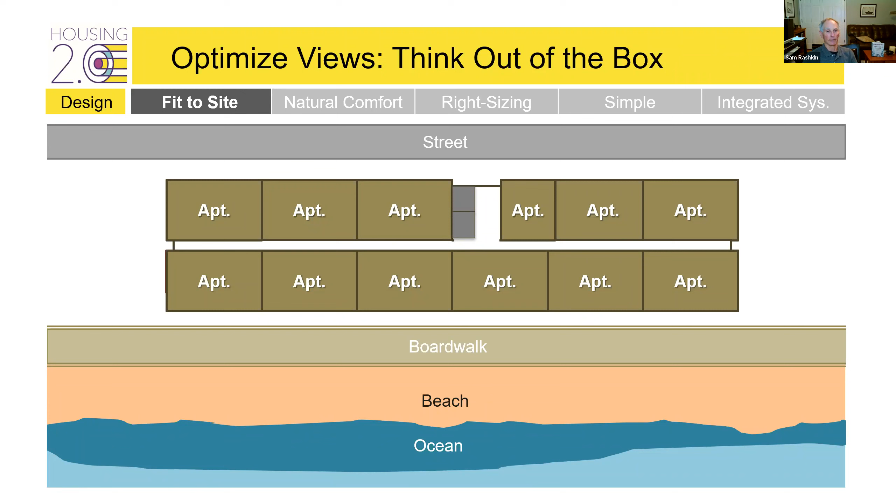So I have a narrow lot on the waterfront, and I'm going to build a multi-family project. The normal traditional solution is just to slap down a double loaded corridor, put the apartments on either side. The problem is there's a building on the ocean, so the double loaded corridor kind of splits it in half, and you have half the apartments with a great view of the ocean, the other half with a horrible view looking across the street at another apartment building and a busy street.

So what you wind up with is half the apartments with a great view, half with a really bad view. And if these apartments are worth X on the street side, the apartments on the ocean side are probably worth 2 or 3X. So you're losing all that value, the asset value lost because only half your units have the great view.

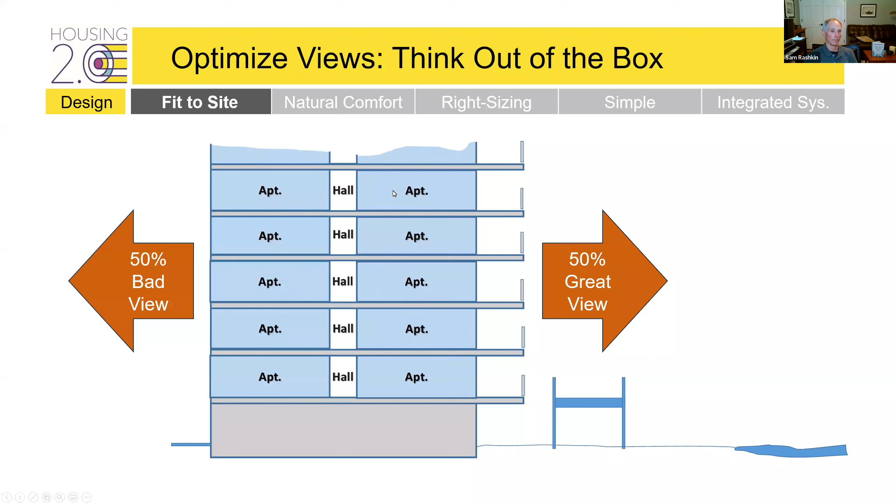That loss is substantial. So when you want to think out of the box, this is a solution borrowed from Le Corbusier, a famous project where he did a corridor every 3 floors. I do it every 2 floors because for disability or universal design purposes and others, you can't have everyone use stairs. So you have 1-story apartments facing the ocean and 2-story apartments facing the ocean.

Now a couple of things happen. One is you wind up with a corridor every other floor, so all that space goes back into marketable use space for your apartments. That has more value than a hallway. The second thing is your elevator only stops every other floor, so it's also lower cost for the elevator. And you have 100% of units with a great view.

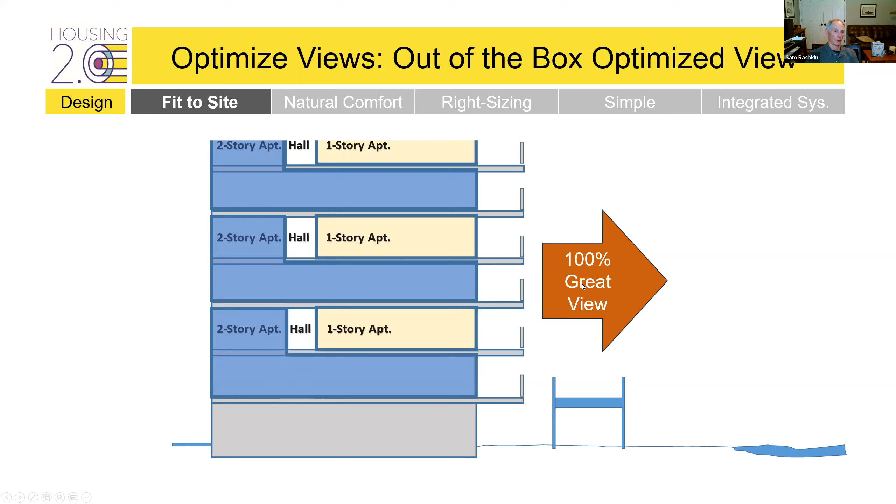This is how it lays out. You have your 2-story apartments on the street side. So that's the first floor you come in: a bedroom, a stairwell, and a bathroom. And then on the front side, you have your 1-story apartments with bedrooms and living spaces, bedrooms and living spaces.

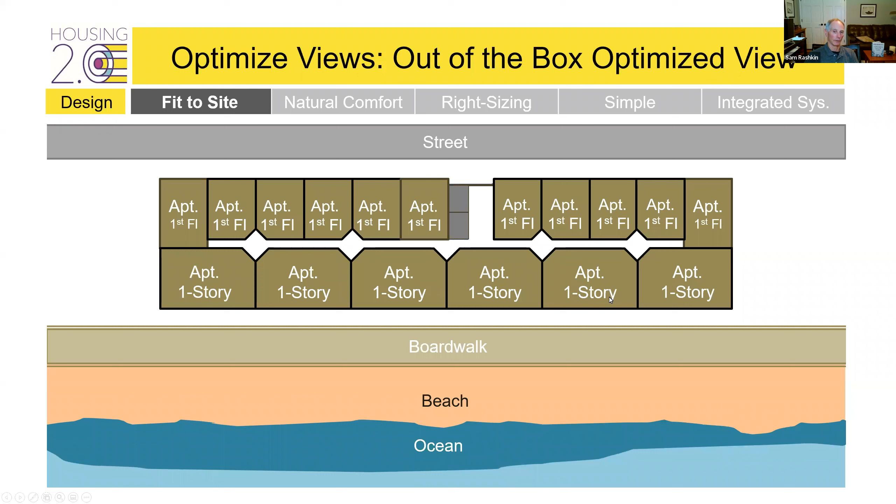And then on the floor with no elevator, you have a contiguous second floor of your 2-story apartments. So you have your master bedroom, your master bath, your laundry, your half bath, your kitchen, your dining, your eating, a normal layout as you would expect going across. And so 100% of units get great views.

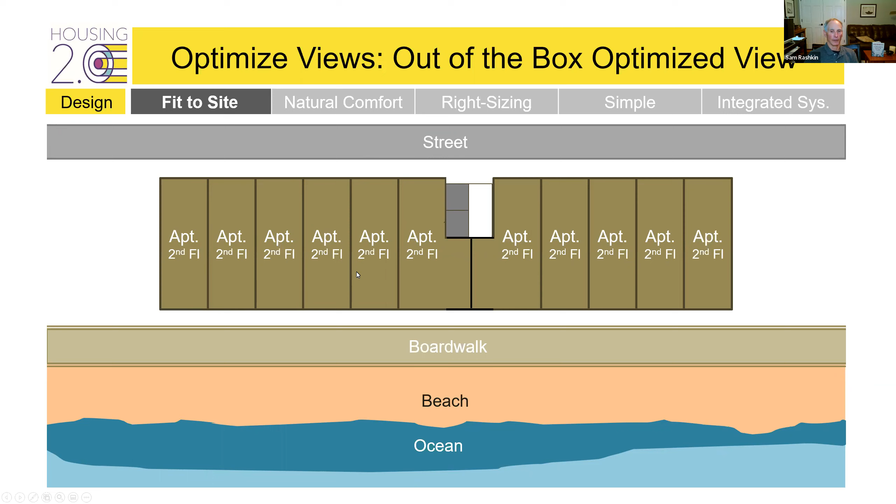The same thing happens if I have a deep site instead of a narrow site. You'll often see this layout where the balconies are kind of looking over each other, and the views aren't that great. Even these balconies are often kind of blocked. That's just the traditional U-shape or separated buildings on a deep lot.

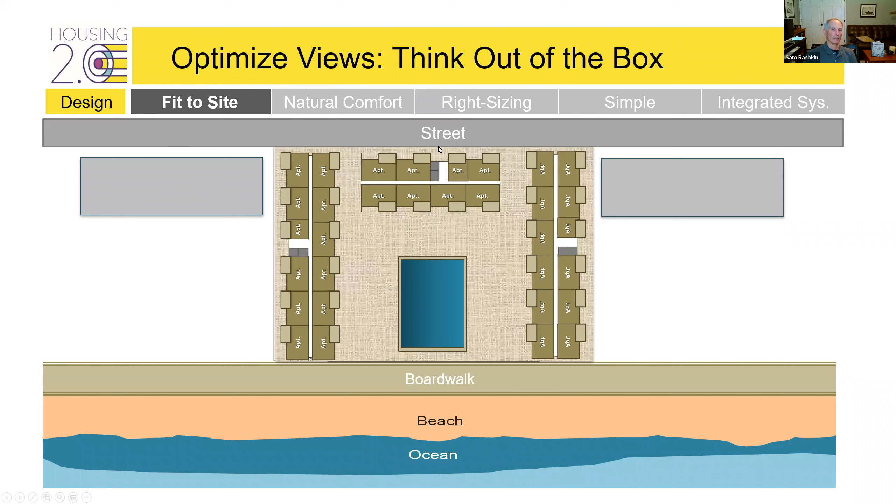I would suggest if you take view as a dominant factor, that's where you start. You might wind up with something like this: a sawtooth design, where every home has a complete unblocked view of the ocean on this side as well. And then I throw in some open spaces, pickleball courts, and landscaping just for playing around.

But you kind of get the idea that once you understand the absolute force of having great views on the economics and satisfaction of your buyers, then you just let that drive all your design.

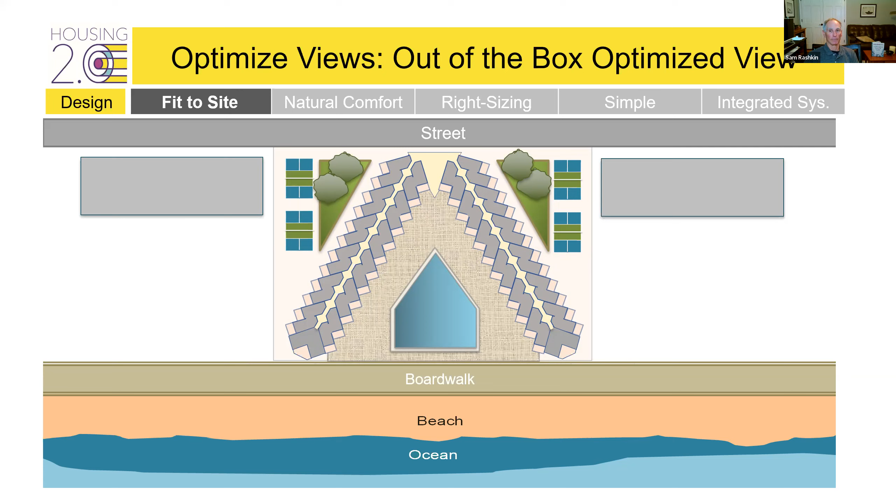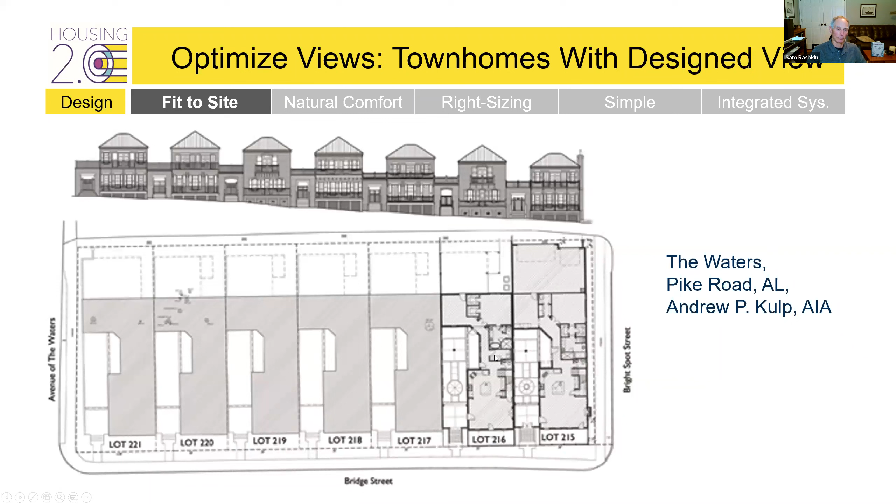And so I found a project that actually did this after I put this down. In Alabama, of all places, Pike Road, the Waters, there's the exact layout. You have the garage in back, but you come in to a middle entry, a full room, a full front porch, all these rooms off the view. And there's the actual project as constructed.

I years later went and checked Zillow and found one of these homes was for sale. I was a little disappointed in the courtyards themselves. I thought they were missing expert landscape design because they had the views and things were after.

The last thing we'll talk about on fit to site will be this concept about rear garages and front porches. Again, I think most people understand the value of front porches for community connection. When you want it, then you can sit there. Rear garages get rid of what's called a pig snout design concept, where the garage dominates the front elevation. Again, this creates a better community connection. The no rear yard concept, or no rear fences, is kind of tough for some regions to do, because the market preference seems to have gotten established for fencing in properties in California and a lot of the western and southwestern states. So you have to kind of go with that as best you can.

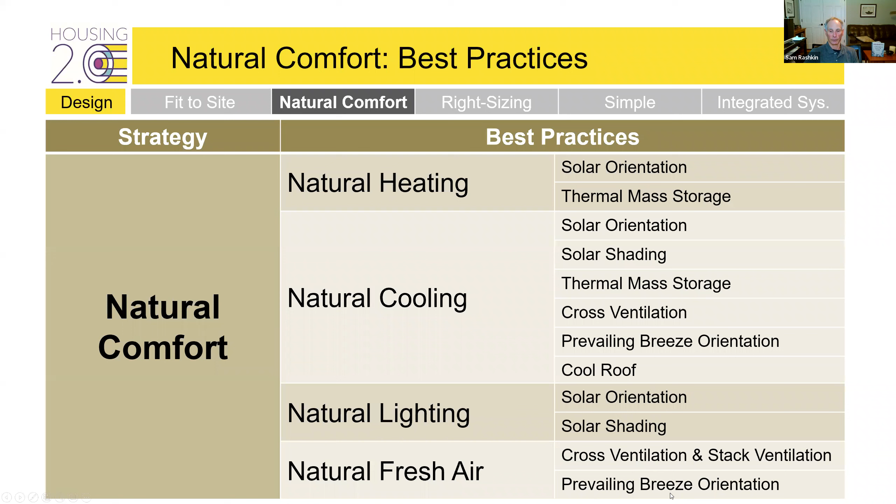I remember I proposed a program when I worked at the California Energy Commission, where we would certify and give a label to every home simply based on orientation. You didn't have to do anything. If you were on a north-south facing lot-meaning the front and back, the main elevations, face north-south-we would give you a natural comfort certification, just to make it an issue in the MLS so that more developers would want to offer more natural comfort lots and actually create east-west streets with north-south facing homes. It's funny how I wound up at Energy Star, always having a mindset for labeling homes.

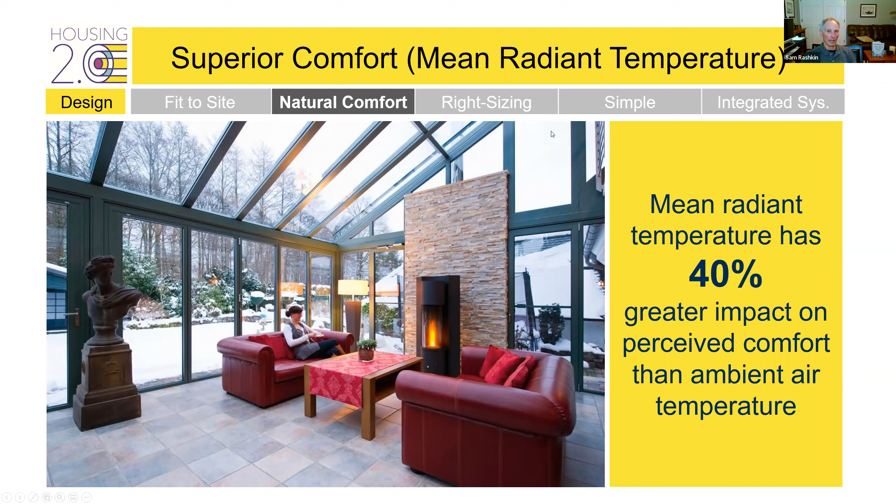Comfort is amazingly enhanced with natural comfort, because mean radiant temperature has 40% greater impact on perceived comfort than ambient air temperature. So the thermal mass and warm surfaces created in winter and cool surfaces created in summer were 40% more comfortable than if ambient air alone is used to create comfort. It's amazing how much comfort improves when you get surface temperatures working for you.

And natural light is a huge benefit. It boosts vitamin D, wards off seasonal depression, improves sleep and productivity. It's not surprising-if your pet's like mine, that's where they like to hang out. So we know natural light is a huge benefit.

So why natural comfort? It's all these user experiences we just covered: glare-free views, free heating and cooling, superior comfort with mean radiant temperature controls, natural light, fresh air. And again, this resilience—the fact that we thrive in the space even without mechanical heating and cooling. That's thousands of dollars of estimated value in terms of better experience, in my estimation.

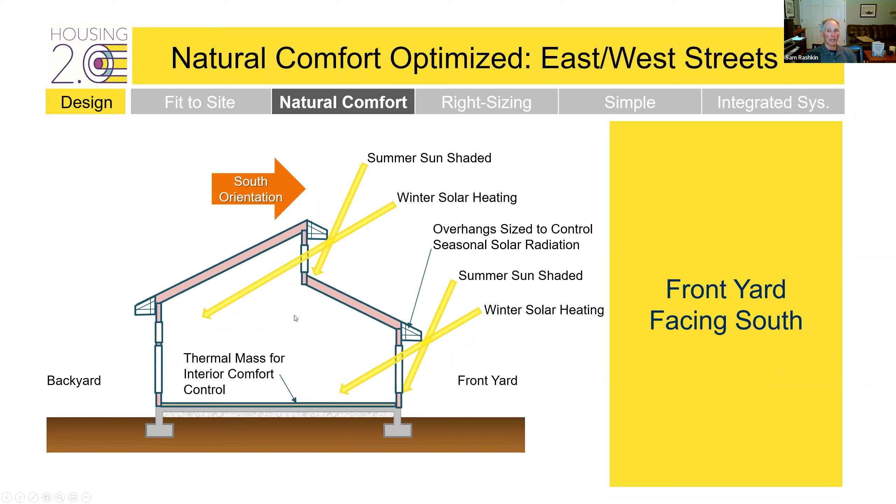For instance, on an east-west lot, one of your designs could have a sawtooth configuration to bring light deep into the space. Since most of the living happens in the back towards the view, maybe have a design that captures the light and heat and brings it back, and captures the cooling and daylight as well in the summer. And if you have a rear-facing south orientation, just raise up that back part of the house to get light, heating and cooling as deep into the space as possible.

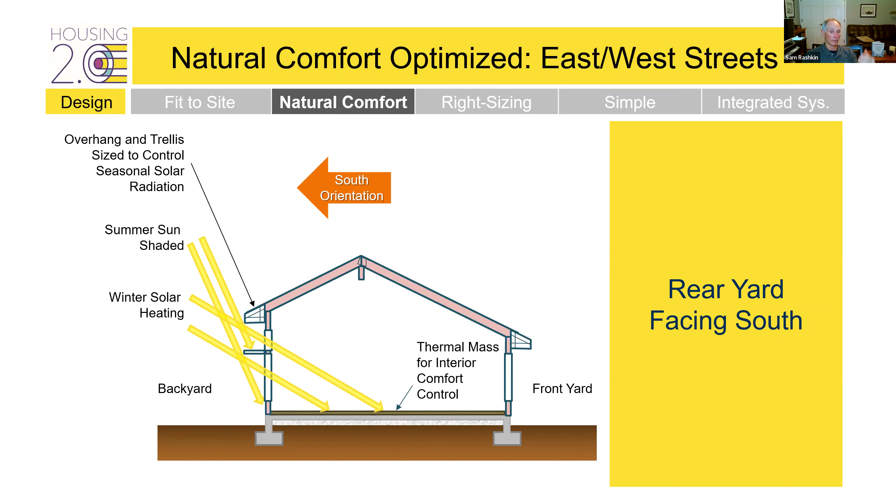Just having great standard designs that are responsive to those two lot configurations, with various floor plans and footprints that leverage that.

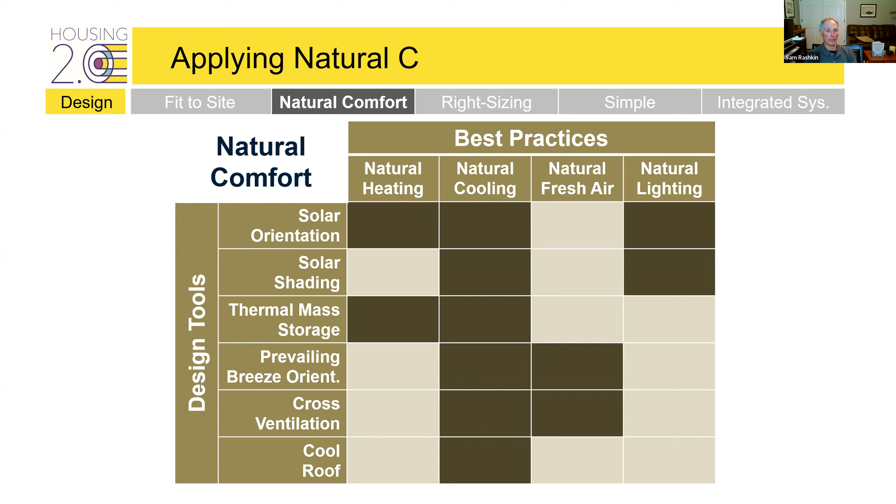The tools are, again: orientation, shading, thermal mass, prevailing breeze orientation, cross ventilation, and cool roofs. This is how it basically works. For natural heating, you need solar orientation and thermal mass. For cooling, use all 6 of the design tools. For natural fresh air, prevailing breeze orientation and cross ventilation. For lighting, again, solar orientation and solar shading—it's kind of a freebie that comes along with natural heating and natural cooling.

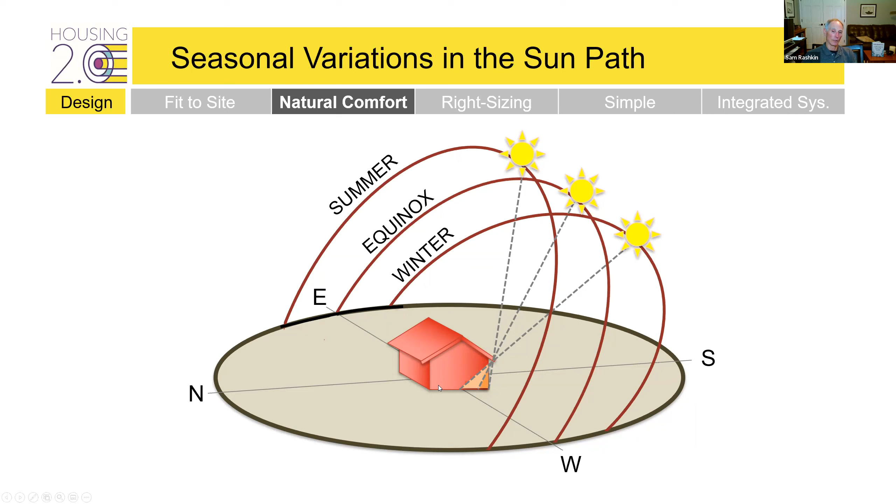The reason for all this is the path of the sun changes during the course of the year. In the summer, it rises in the northeast and sets in the northwest, with a much higher arc, so it can be shaded in the summer. In the winter, it rises in the southeast and sets in the southwest, with a much lower arc, so it can penetrate the windows even with the shading because of the lower angle. It's very basic.

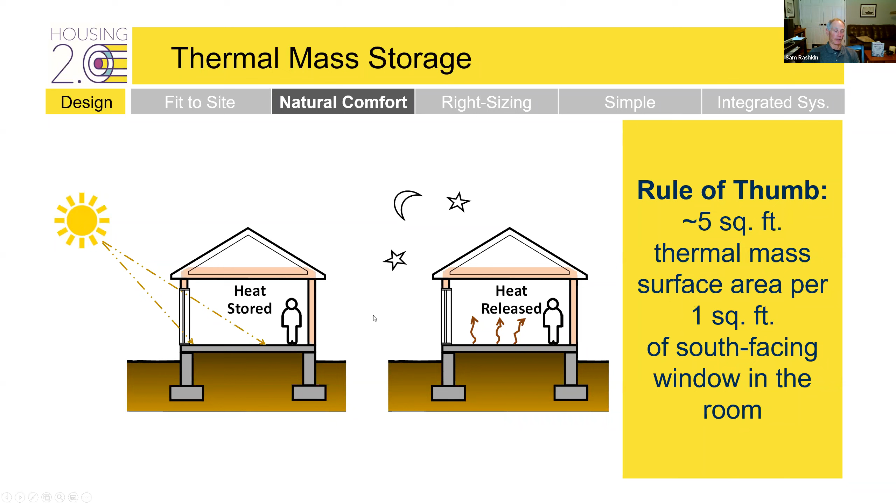And then at night, when it gets cooler, the heat's released so that you have a much better balance, almost like natural thermal control in the home with the thermal mass. The rule of thumb is about 5 square feet of thermal mass for every square foot of south-facing window in the room. Also recognize the first 2 inches of thermal mass give you about 80% of the benefit of the thermal mass material's specific heat storage capacity.

Now, the city that probably evidences this the most might be Charleston, South Carolina. It does so because it's the only one of the 5 Revolutionary era cities to suffer a massive economic collapse after the country got established. Essentially, where Philadelphia, Washington, New York, and Boston were all torn down due to all the economic stimulus and growth those cities were experiencing, this city just had an economic downturn, and all the structures remained far into the future, to a point where people realized what a beautiful city it was in its natural design.

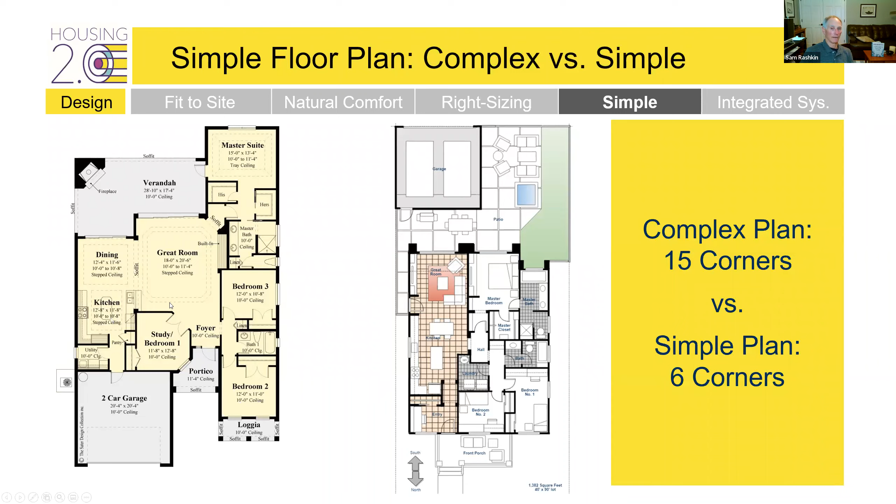Again, I don't believe complexity buys you any real advantage. Here's an example of a low-income design I found from a group working in the South. They're trying to create this recessed front porch. The 12 by 16 recessed porch takes away about 200 square feet from the floor plan, and adds about 24 feet of linear wall, 12 feet here and 12 feet here. In other words, if this wall was here at the outer edge, I wouldn't need these two 12-foot exterior walls. So I have 200 less square feet than this design, and I have more exposure to outside weather conditions.

And the cost of the 24 feet of wall, times the cost of the wall and the foundations, is $2,600 plus on 2,000 square feet. And this is supposed to be affordable housing. Now admittedly, it's built with volunteer labor and they can maybe get away with some of these costs, but I believe we should always come up with designs that can be built by normal businesses for the least cost. So this complication doesn't add any value, it hurts the value. I'm saying reinvest the cost savings into a much nicer front porch.